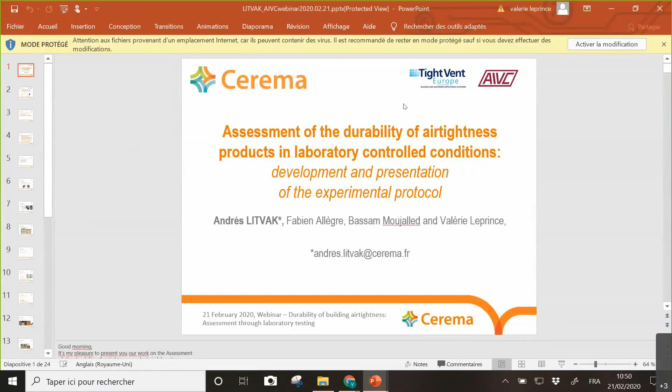Good morning. It's my pleasure to present our work on the assessment of the durability of airtightness products in laboratory controlled conditions. I will present the development and the definition of the experimental protocol.

I am Andrés Litvak, an engineer at CEREMA. I've been working on airtightness for more than 20 years, and I've been collaborating on projects with French centers.

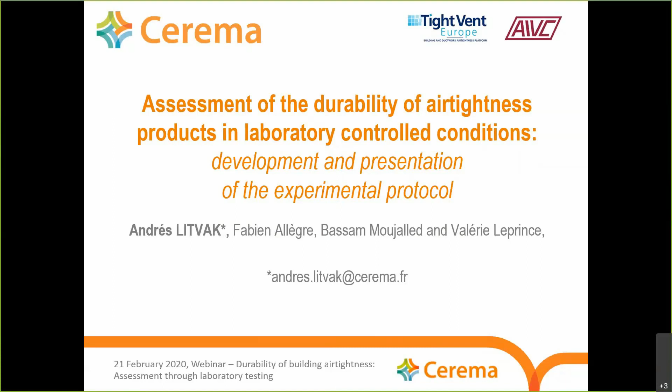As Valérie explained, this is part of a research project, Durabilit'Air, and I'm presenting task number 3, which dealt with laboratory conditions. This was done with our partners, Rescoll, a French technical center and research company based in Bordeaux, France.

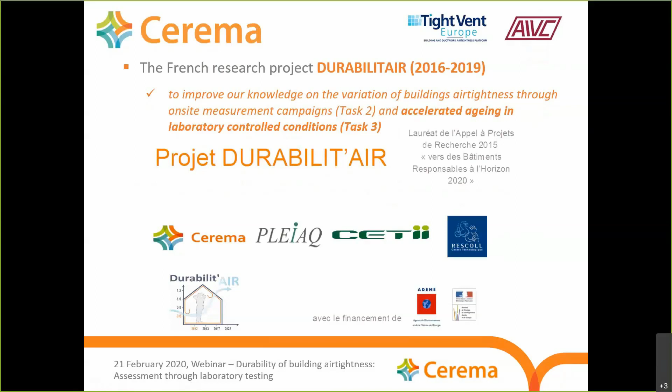The Durabilit'Air study is a multi-year work that aimed at improving our knowledge on the variation of buildings' envelope airtightness through on-site measurements and accelerated aging in laboratory controlled conditions.

Valérie presented the state-of-the-art review on laboratory conditions in this seminar. She and my colleague Bassam Moujalled presented preliminary results in a previous AIVC webinar, so you should get the overall overview of the project by attending both seminars.

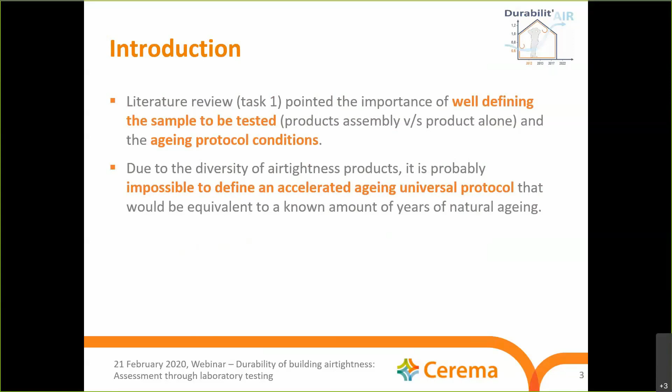The state-of-the-art showed that there is no standardized protocol to characterize in laboratory controlled conditions the durability of product assemblies regarding airtightness performance. Due to the diversity of airtightness products, it's difficult, perhaps impossible, to define an accelerated aging universal protocol, as Valérie mentioned, equivalent to a known amount of years of natural aging.

In light of this work, we observed that results of aging tests vary from one study to another, as Valérie showed us. One of the main reasons is that the protocol is not standardized, but nevertheless the following general conclusions can be drawn: first, implementation has a strong impact on durability.

This relates to the question that was asked to Valérie. Products do not have the same reaction under normal conditions as when subjected to extreme conditions of temperature, humidity, or pressure. The standardized procedure for aging of sealant is lacking to characterize products and especially assemblies regarding airtightness performance, and we will focus on the assemblies of products rather than the products themselves.

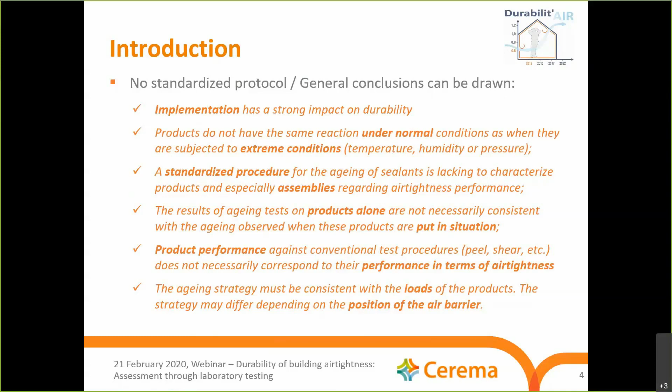Our methodology consisted in defining the exposure conditions of relative aging tests through thermal, humidity, and pressure variation cycles. We defined a protocol by developing an experimental chamber, choosing representative samples of assembly products, and defining the accelerated aging conditions.

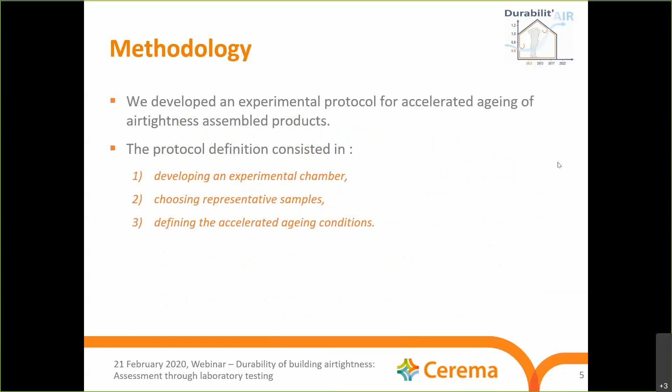The environmental chamber consisted of an accelerated weathering chamber, which you can see here, measuring 1 meter by 1 meter by 1 meter, so one cubic meter, a pressure test bench for differential pressure exposure and airtightness measurement, and a sample holder between both enclosures.

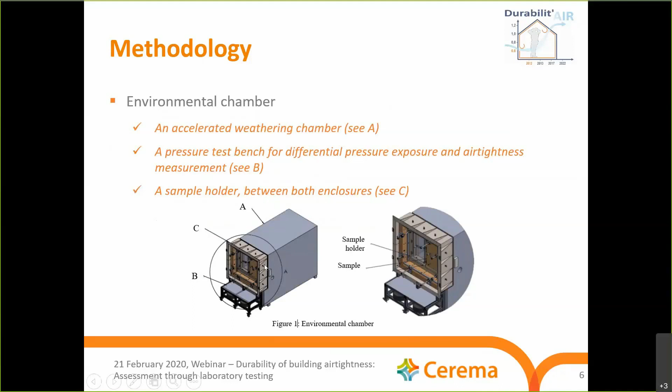As represented in the illustration, the frame of the sample holder and the differential pressure bench constitute a single independent machine that allows performing wind cycles and airtightness measurements between minus 250 pascals and plus 250 pascals.

We created a differential pressure on the sample by positive and negative pressurized air with air mass flow controllers. Pressurization created the conditions for both wind exposure and the airtightness measurement test.

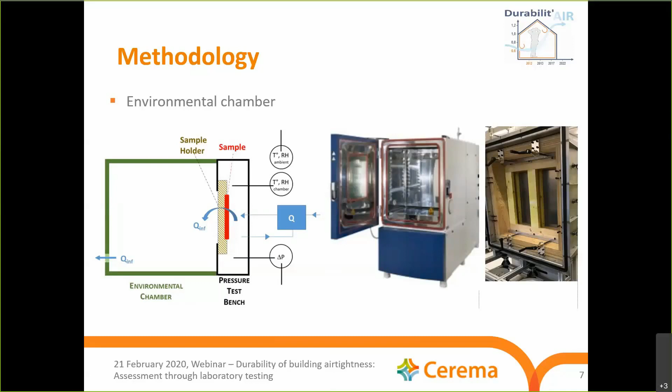We designed the technical specification of the pressure test bench to get the best compromise between good signal stability and a fairly large user range, in order to test various implementation solutions while maintaining controlled reactivity and sufficient flow rate to carry out cycles with imposed frequency. Tightness, repeatability, and reproducibility tests were also performed.

This was the presentation of the exposure chamber. For the methodology, we defined a test as 4 successive cycles applied one after the other, with intermediate measurements to control the evolution of airtightness between each cycle. So we designed 4 weathering cycles in order to accelerate the aging of the samples.

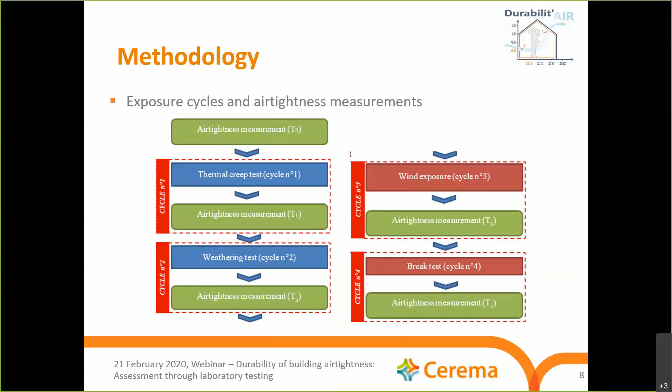For cycle number 1, we apply the following cycles to the exposure chamber: 60 degrees centigrade and 50% relative humidity for 21 hours. Then we did the airtightness measurement, and then we applied a pressure load wind cycle of plus or minus 50 pascals for 200 cycles over 2 hours. So the duration of the cycle was approximately 24 hours.

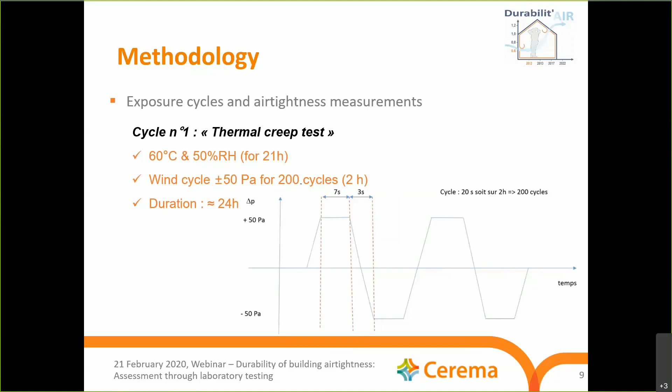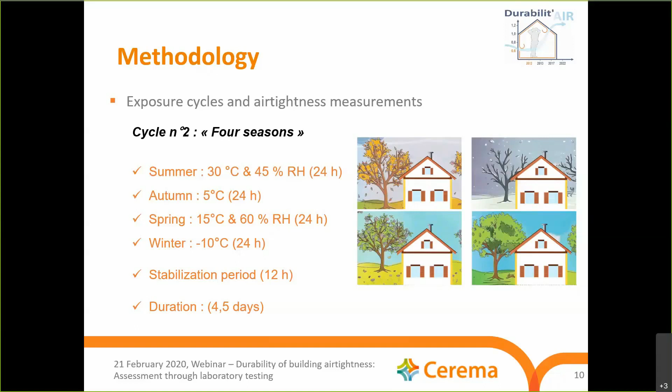For cycle number 2, we applied the following cycle, which we call the 4-season cycle: winter at minus 10 degrees Celsius for 24 hours, spring at 15 degrees centigrade and 60% relative humidity for 24 hours, summer at 30 degrees Celsius and 45% relative humidity for 24 hours, and autumn at 5 degrees centigrade for 24 hours. Then we had a stabilization period for 12 hours, and we ended the cycle with a new measurement of the airtightness. So the whole cycle was approximately 4.5 days.

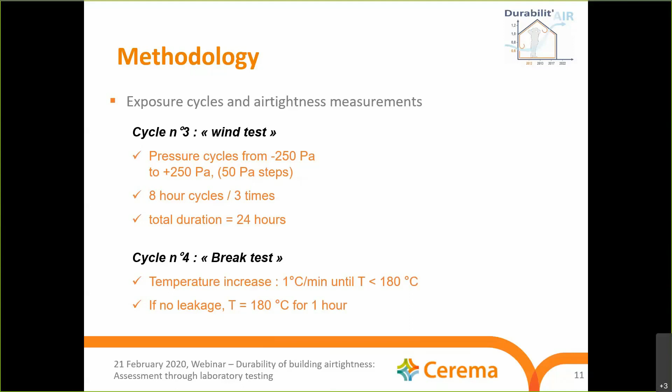For cycle number 3, we applied pressure cycles from minus 250 pascal to plus 250 pascal in 50 pascal steps. We did 8-hour cycles 3 times, for a total duration of 24 hours. For the last cycle, we applied a temperature increase of plus 1 degree centigrade per minute until the temperature reached 180 degrees centigrade. If no leakage appeared, we applied a constant temperature of 180 degrees centigrade for 1 hour.

Now for the definition of the samples. These are samples made of an assembly of products. The 3 types of assembled products, as treatments of airtightness of the joints between windows and walls, were chosen as samples to be tested.

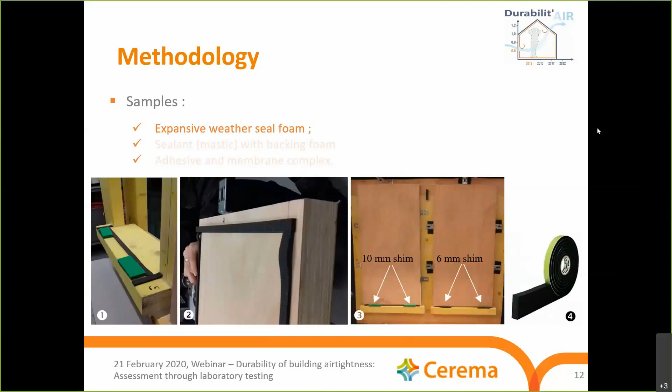The second sample is the assembly of backer rods filled up with mastic as a sealant, implemented between the frame and the opening of a wooden carpentry. The selected backer rod has an operating range of 5 to 11 millimeters, and a fixing coat was applied to the wooden surface before implementing it. This sample also allows the installation of 2 samples in parallel, as you can see in the picture.

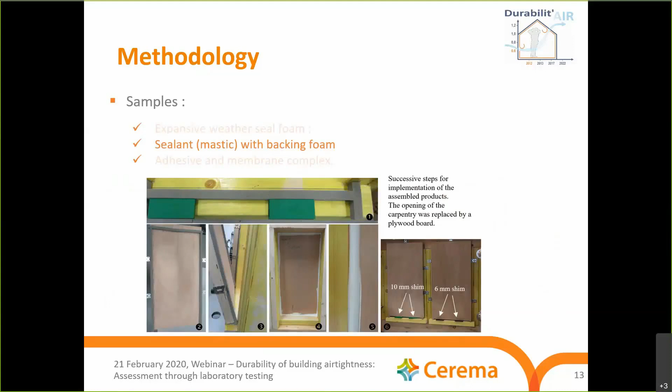Last, the third sample is the assembly of a membrane taped and stapled on the opening of a wooden carpentry. 2 identical membranes were implemented in the sample holder, as you can see in the picture.

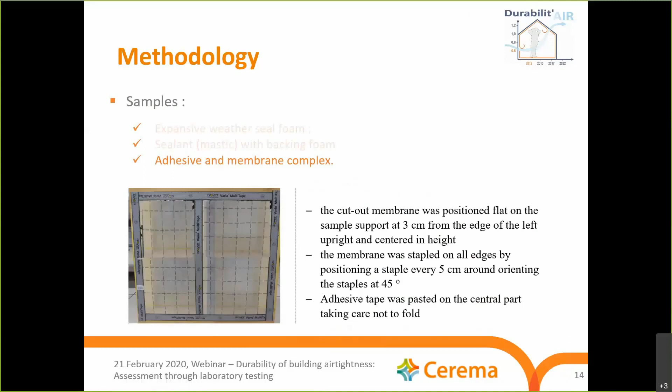So the first result that we collected: we could first observe that the 3 samples had very different ranges of airflow rate permeability for the initial measurements before the aging test began.

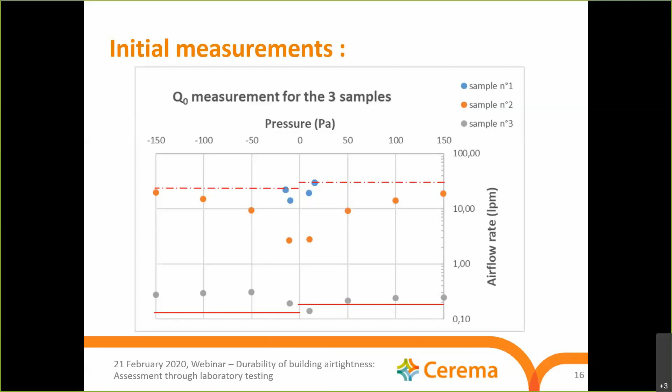Another comment we had is that these results showed no trend in the impact of the pressurization mode, meaning positive or negative pressure, on the corresponding air permeability flow rate. So we can see that we have very different ranges in air permeability across the 3 samples, and we focused on sample number 2, which allowed us to see the main results for our work. The air permeability flow rate was measured over the full range, minus 150 pascals to plus 150 pascals, for this sample.

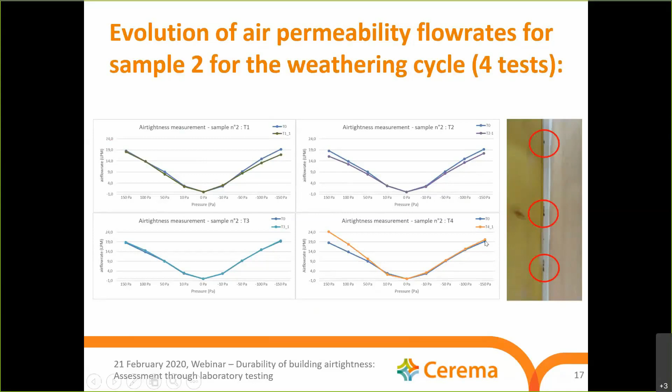For sample number 3, we had a sample that was very airtight. It was very sensitive to pressure variations, both positive and negative. We didn't notice any significant deterioration of the air permeability flow rates for the first 3 tests of the cycle, and for the breaking test, the last one, the rupture occurred after 40 minutes at a temperature of 60 degrees.

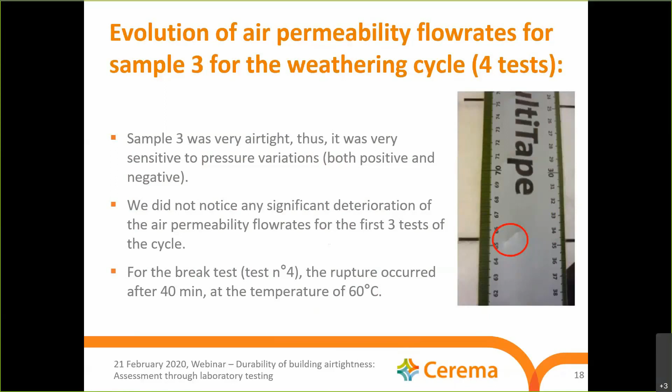As a conclusion, I would say that the 3 types of samples made of assembled products as treatment of carpentry airtightness showed very different results according to the maximum compensation capacity of the air permeability flow rate of the bench. We were limited by these specifications.

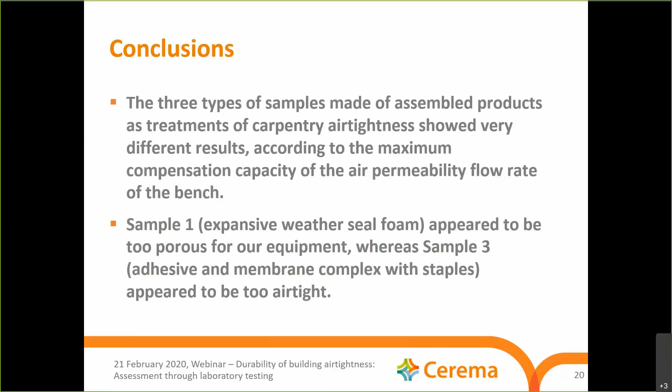The choice of sample made us find that sample number 1, the expansive weather seal foam, appeared to be too porous for our equipment, whereas sample number 3, with the adhesive and membrane complex with staples, appeared to be too airtight. So we could draw some interesting conclusions from sample number 2, with a rupture that occurred at 120 degrees Celsius and showed a significant decrease of the airtightness of the sample.

As we saw, we measured a slight deterioration after cycle number 3, up to 7%. Nevertheless, we could not draw any definitive conclusion about the artificial aging protocol at the elevated temperature of rupture. Remember what was mentioned by Valérie on the experimental conditions of this test, which may probably contradict the statement that one should never test products beyond their real-life exposure conditions.

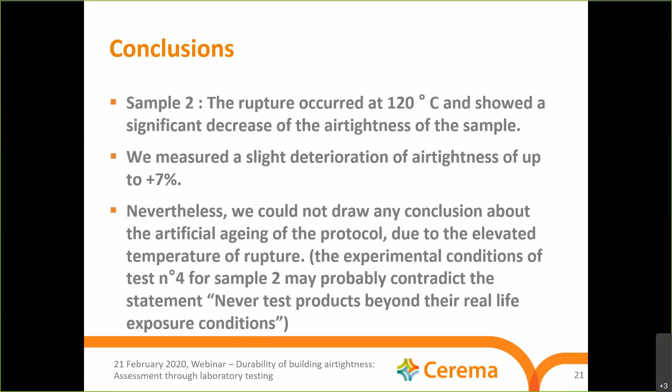The improvement in airtightness during the aging cycle of the second sample is probably due to humidity from the thermal creep test and the weathering test. Thus, we recommend using inert materials as sample holders for future work. Here, the wood may have played a significant role.

This was confirmed by the field measurement results from task 2, presented in the article by Bassam Moujalled, on measurements of wood structure houses that tend to improve over years. We explained that by the expansion of the wood with humidity, which would clog the leakage.

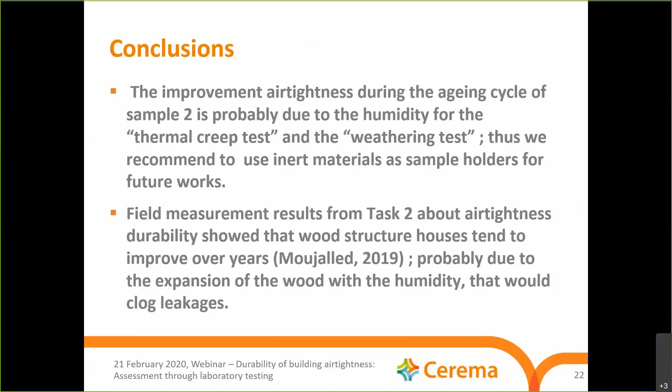As a last conclusion, the wind exposure test, test number 3 of the aging cycle on sample 2, showed a very moderate increase of air permeability. We think that the duration of this cycle was too short, and that an exposure duration of at least 1,000 hours, approximately leading to a test duration of 1.5 months, should be necessary.

We are working right now on defining future work, and we plan to investigate a better compromise between signal stability, usage range, and control reactivity of airflow of the bench, and exposure protocol conditions. That might be a key point.